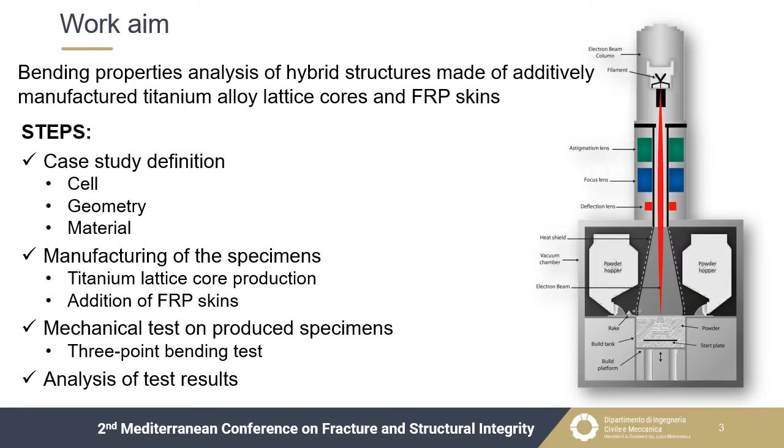The produced lattice core had a section of 30 mm by 9 mm and a length of 270 mm, while the skin thickness was equal to 1 mm for all types of material considered. The titanium powder adopted in the present research activity was made of the Ti6Al4V alloy, that is the most used titanium alloy in the aerospace and aeronautical fields. As concerns the skins, three different types of fiber were taken into consideration: carbon, aramid, and glass fibers. All the prepregs had an epoxy resin as matrix, and a satin weave fabric as reinforcement, except the carbon one that was plain weave.

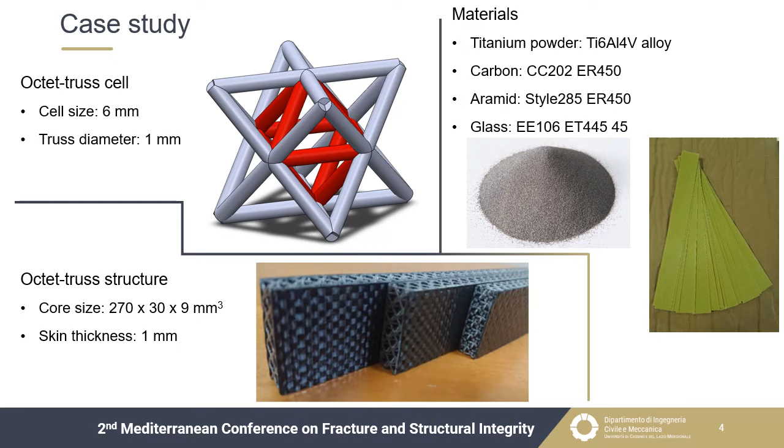As concerns the manufacturing process of the cores, after having defined all the geometric parameters, the first step consisted in the creation of a virtual geometrical model. For this purpose, the Materialise Magics software was adopted, that was able to draw a lattice structure in a specific volume. Therefore, only the dimensions of the parallelepiped representing the core and the type and strut diameter of the cell were necessary. Once the CAD model was ready, it was exported in the slicing software of the 3D printer. The machine used was the Arcam A2X, while the relevant slicing software was the Build Assembler.

Then, the machine was prepared for the manufacturing run. The powder reservoirs were filled, and the process parameters were set. After, the vacuum was drawn in the manufacturing chamber. The electron beam was calibrated and the manufacturing chamber was preheated at 700 Celsius. As the imposed temperature was reached, the specimens were built according to the typical sequence of a powder bed additive manufacturing process. At the end of the process, the chamber was cooled down and the specimens were extracted from the unmelted powder and cleaned in a suitable chamber using pressurized air and a sandblasting machine, while the final depowdering operation was carried out in an ultrasound bath.

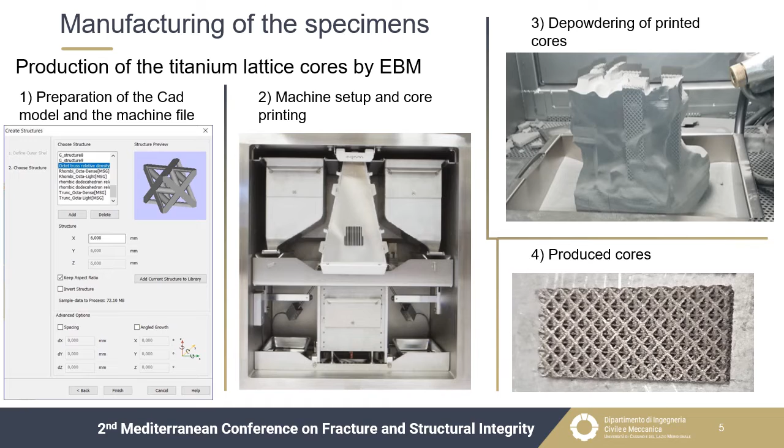Then further steps were required to create the composite skin. For this purpose, the prepreg vacuum bag process was chosen. FRP prepreg plies were prepared and layered on the mold, together with the lattice core. The number of prepreg plies was chosen in order to obtain a thickness of about 1 mm for all the face sheets. So 5 plies were necessary for carbon skins, 4 for aramid ones, and 9 plies for glass ones. This similarity was important to perform a meaningful comparison between the different types of specimens.

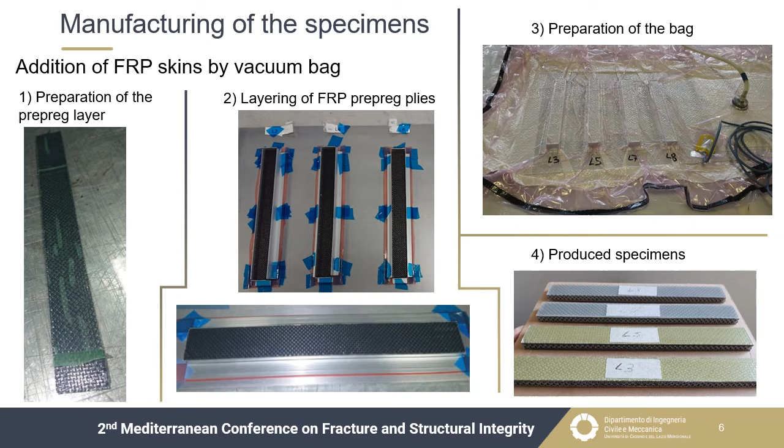All the layered specimens were covered with the release film and the breather fabric. Then the mold was closed with the vacuum bag. After the vacuum was drawn, the mold was positioned in the autoclave for the curing process.

The produced specimens were tested according to the ASTM C393. That is the standard for the evaluation of flexural behavior of sandwich structures. In fact, the flat specimen considered in this work can be assimilated to a sandwich structure. Indeed, the 3D printing is usually exploited for complex shaped parts, but a flat shape was chosen for this mechanical

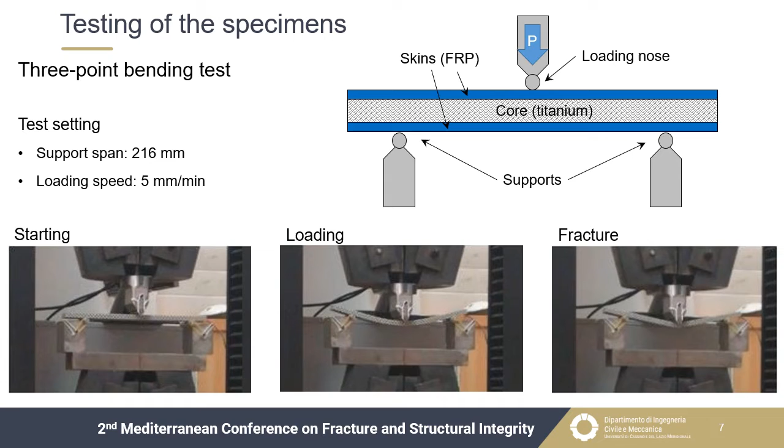behavior analysis. The test scheme consisted in the typical 3-point bending flexure. The specimen was placed on two supports and it was loaded in the center by a loading nose. The span length was chosen equal to 216 mm, while the loading speed to 5 mm per minute. After the starting of the test, each specimen was loaded until the fracture.

From the experimental data, it can be noted that the highest strength belonged to the carbon skin structure, that reached a maximum load of about 3000 Newton, while the lowest one was obtained by the aramid skin structure, with a value of less than 2100 Newton. As concerns the maximum displacement, the highest value was reached by the aramid specimen, and it was 21 mm, while the lowest value belonged to the carbon specimen, and it was 7 mm.

The curves of the carbon and the glass specimens were characterized by a linear load increase, and the latter presented a sudden load drop till zero after the maximum point. The highest flexural rigidity, evaluated as the slope of the load increase section, was obtained by the carbon specimen, while the lowest by the glass one, even if the aramid specimen presented a minor slope in the second tract of

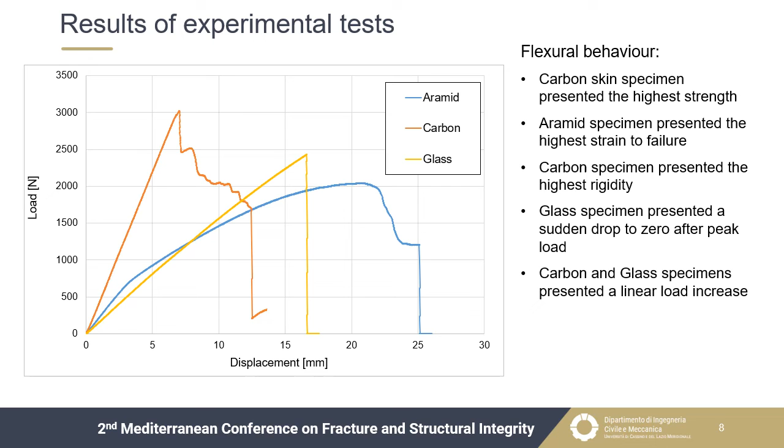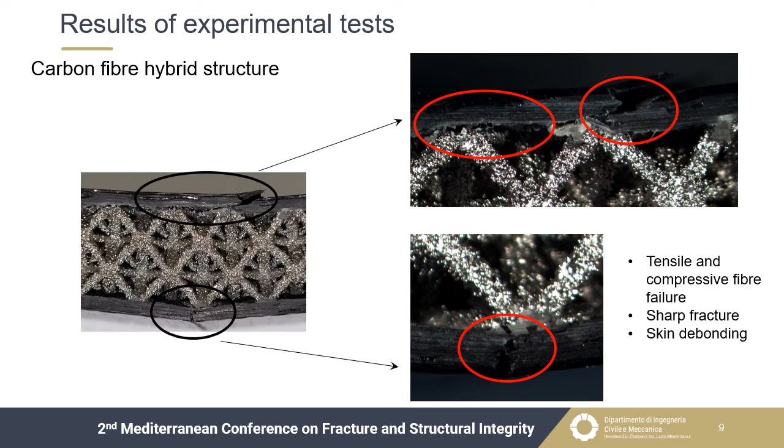the load increase. Some images of the fracture zone were taken through an optical microscope to inspect the fracture mode. As concerns the carbon specimens, the fiber failure was observed on both the upper, just below the loading nose, and the lower surfaces. In particular, the former showed a compressive fracture, while the latter a tensile one. The most interesting thing to highlight is that a skin detachment was observed on the upper surface, and the core

was not damaged. As concerns the aramid specimen, also in this case the fiber failure was observed, as for the carbon one, together with the skin detachment in the upper zone. The fracture surface of the carbon laminate was sharp and clean, while for the aramid a kind of fraying of the fibers was observed. Moreover, for the aramid skin structure, a partial failure of the core was observed. These different damaging features can explain the different shape of the loading curve, characterized by a decrease of the rigidity near the maximum load.

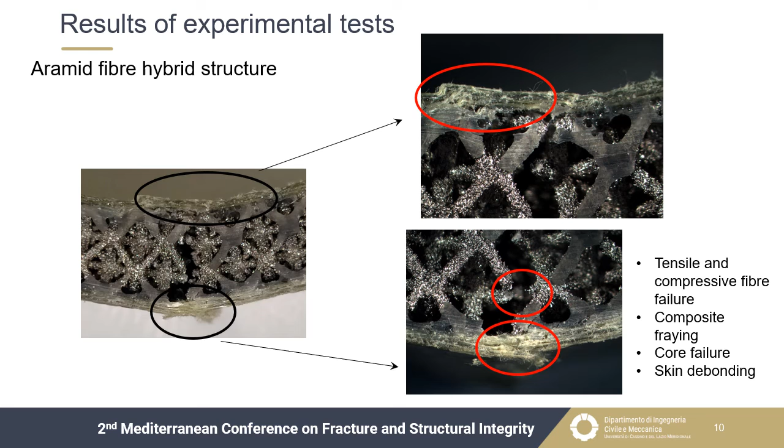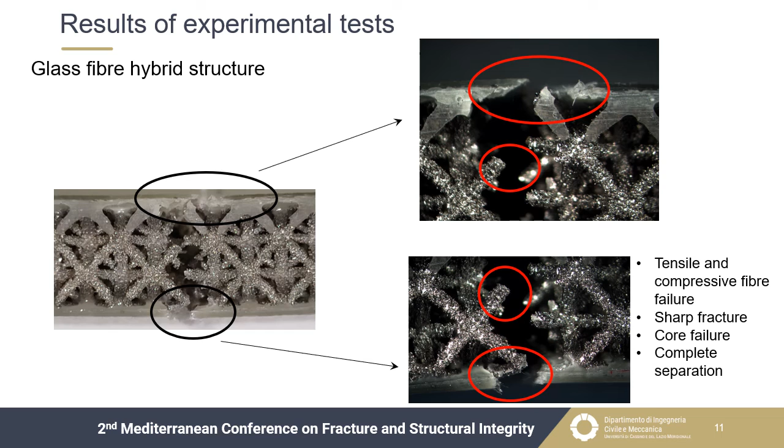In the last specimen, the glass skin one, the total failure of both the skins and the core was observed. In fact, after the test, the specimen was split into two halves, and this explained the reason why a sudden load drop till zero was found. However, in this case, the debonding of the skins was not observed.

The aim of the present work is to explore the effect of the skin material on the bending behavior of metal lattice core structures. In particular, three different types of FRP skins were considered: carbon, aramid, and glass fiber, and the core was made of titanium alloy through EBM process.

The three-point bending test carried out on all the produced specimens highlighted a better flexural behavior of the carbon skin ones, that presented the highest maximum load and the maximum rigidity, while the glass skin specimen presented the worst bending performances. Considering the micrograph of the fractured specimens, different damage mechanisms were observed and can partially explain the different shapes of the load displacement curves.